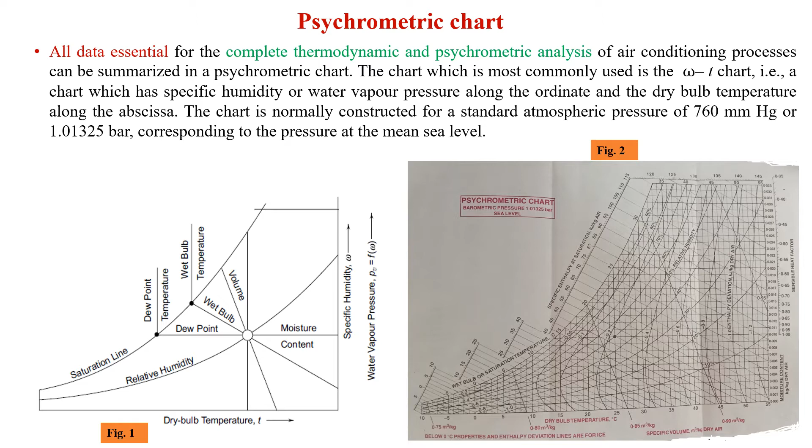Psychrometric charts are also prepared for sub-zero temperatures for extreme winter heating calculations, and for high temperatures for calculations of drying processes. In a sub-zero temperature chart, the water vapor pressure is that of sublimated vapor over the ice, since 0.01 degree Celsius is the triple point of water. Also, the latent heat used for enthalpy calculations is that of sublimation instead of vaporization. Psychrometric charts are to be specially constructed for localities at higher altitudes and consequently lower barometric pressures.

A keen observation of the psychrometric chart is really essential in order to understand the range of various psychrometric properties on the psychrometric chart. As we discussed earlier, the dry bulb temperature here is taken along the abscissa, and it is ranging from usually 0 to 55 degrees Celsius, and along the ordinate we have taken the specific humidity or the moisture content, and it ranges from 0.0 to 0.033 kg of water vapor per kg of dry air.

So this is the saturation curve, and there are lines parallel to these. So these are the constant relative humidity lines, and they usually range from 10% to 100%. There are inclined lines of constant specific volume also. When we look at its range, it ranges from 0.75 meter cube per kg of dry air to 0.95. So this is basically the workable range; most of the air conditioning equipment that we encounter usually operate in this particular range.

A specific enthalpy scale is also given here, which ranges from 0 to 115, and up to 145 kilojoules per kg of dry air. There are constant WBT lines also. These lines are slightly more inclined as compared to the constant specific volume lines. Their value can be read from this saturation curve here. As we move along this, we go through the different wet bulb temperature values at saturation. So these are 0, 1, 2, 3, 4, 5 degrees Celsius like this.

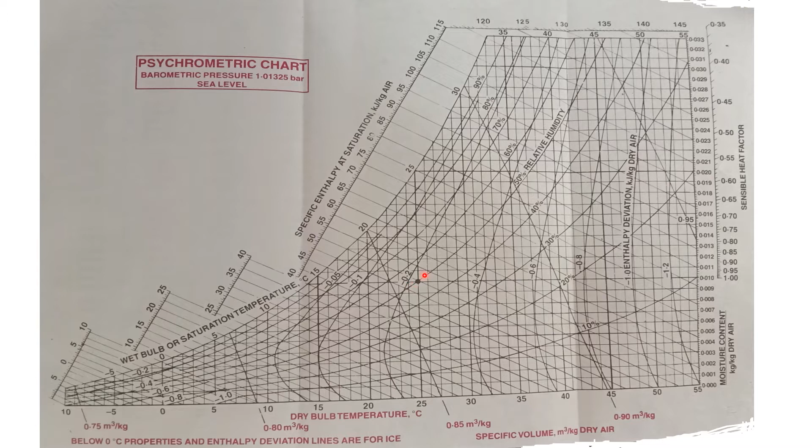So let us have a look at the range of various psychrometric parameters that appear on the psychrometric chart. We notice that the dry bulb temperature ranges from 0 to 55 degrees Celsius. Wet bulb temperature also ranges from 0 to 55 degrees Celsius, and dew point temperature also ranges from 0 to 55 degrees Celsius. Specific humidity ranges from 0.001 kg of water vapor per kg of dry air to 0.033 kg of water vapor per kg of dry air.

Specific volume ranges from 0.75 to 0.95 meter cube per kg of dry air. Relative humidity ranges from 10 to 100%, and the specific enthalpy scale goes from 0 to 145 kilojoules per kg of dry air. There are various types of psychrometric charts available with us. For the normal dry bulb temperature range of 0 to 50 degrees Celsius and omega, specific humidity, ranging from 0 to 0.03 kg per kg of dry air.

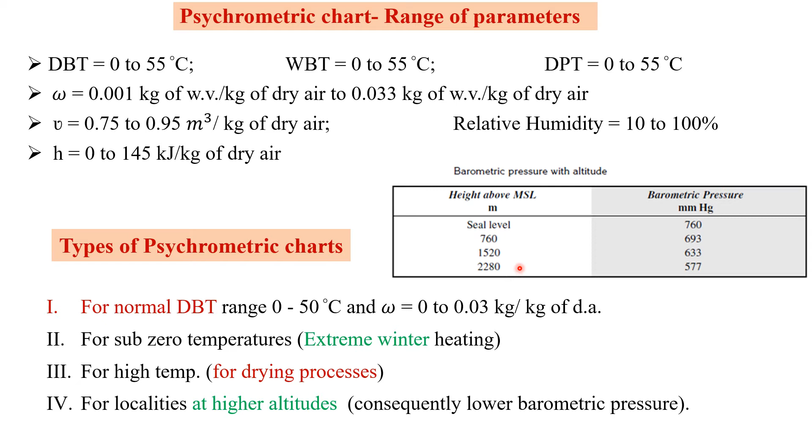For sub-zero temperatures, that is for the case of extreme winter heating, we have got a separate psychrometric chart. Likewise, for drying processes which involve high temperatures, we also have a separate psychrometric chart. And for localities at higher altitudes where the barometric pressure is lower, we have one more psychrometric chart. This particular table gives us an idea of how the barometric pressure varies with height from the mean sea level. So obviously when we go above the mean sea level, the barometric pressure decreases.

I hope that you still remember that when a given sample of moist air is cooled at constant pressure, the thermodynamic state of the water vapor changes along this constant pressure line, and the temperature at which the moisture present in the moist air becomes saturated is known as the dew point temperature. So there are two ways of making the air saturated. First, if the given sample of moist air is cooled at constant pressure, eventually it reaches a dew point temperature where the moisture becomes saturated.

Second way of making the air saturated at its dry bulb temperature is that if we keep on injecting moisture into it, the thermodynamic state would change along this isothermal line. So suppose here we have got point number 1. Point number 1 reflects the thermodynamic state of the moisture which is present in the unsaturated moist air. If I just move along this horizontal path and continue to inject moisture, the air becomes saturated, meaning it is now holding the maximum amount of moisture at its own dry bulb temperature.

So air is said to be saturated in this condition because the water vapor which is associated with the dry air part is now saturated. Its thermodynamic state lies on this saturated vapor line. So the saturation line represents the states of saturated air at different temperatures. As an example of fixing such a state on the psychrometric chart, consider an atmosphere A at 20 degrees Celsius dry bulb temperature and saturation as shown in figure 1.

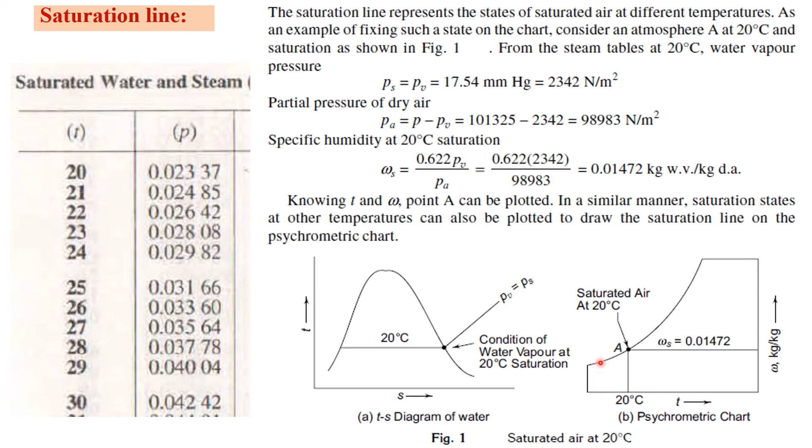So again the intersection of one vertical line drawn from this 25 degrees Celsius dry bulb temperature line and one horizontal line for the increased value of the specific humidity will ultimately give you one more saturation state, and that is the process of generating this saturation curve on the psychrometric chart. So we will continue to plot different saturation states at different dry bulb temperatures. So ultimately it is the locus of various saturation states which are obtained by the intersection of different DBT lines and different omega values.

Now we shall learn how the constant relative humidity lines are developed on the psychrometric chart. I hope that all of you remember that the relative humidity is the ratio of the actual vapor pressure to the vapor pressure which would exist in a saturated mixture at the temperature of the air. The saturation line on the psychrometric chart is therefore the line for 100% relative humidity, since for all points on this line, the partial pressure of the water vapor is equal to the saturation pressure at that particular temperature. So the lines on this chart for any other desired value of the relative humidity can be constructed as follows.

So how did we locate point number A on the psychrometric chart? It was obtained at a dry bulb temperature of 20 degrees Celsius. So for the purpose, we drew one vertical line for constant dry bulb temperature at 20 degrees Celsius, and also one horizontal line for the specific humidity at saturation state. So that is how we obtained the intersection of these two property lines and ultimately had this saturation state.

Now suppose we wish to generate a line for constant relative humidity of 50%. So obviously the partial pressure of the water vapor is going to be half of the value which is at 100% relative humidity at the same dry bulb temperature. If you still remember, the partial pressure of the water vapor at saturation was 2342 Newton per meter square. So at point number C, where we are trying to generate a line for relative humidity of 50%, the partial pressure is obviously going to be half of this value. So it is going to be 1171 Newton per meter square. So this is going to be the partial pressure of the water vapor.

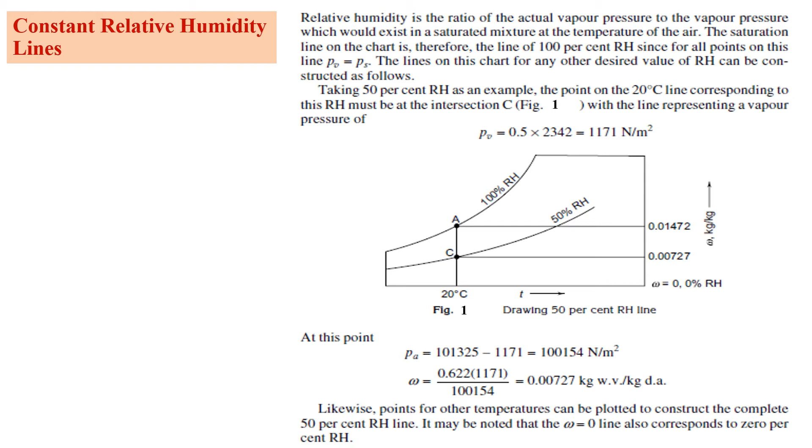It is for sure that one point on this constant specific volume line is point A, where it meets the saturation curve, meaning its thermodynamic state lies on the saturation curve. In order to locate this point, the following trial and error procedure is to be followed, because it is obvious that one end of this constant specific volume line would fall on the saturation curve, but at what value of dry bulb temperature it meets the saturation curve is not known to us.

So we will assume some suitable dry bulb temperature at point A and find PS equal to PV, because at point A the air is saturated, so the partial pressure of the water vapor is equal to the saturation pressure. We will assume the temperature at point A, find PS equal to PV with the help of the steam table, then calculate the partial pressure of the dry air, then calculate the specific volume and check it.

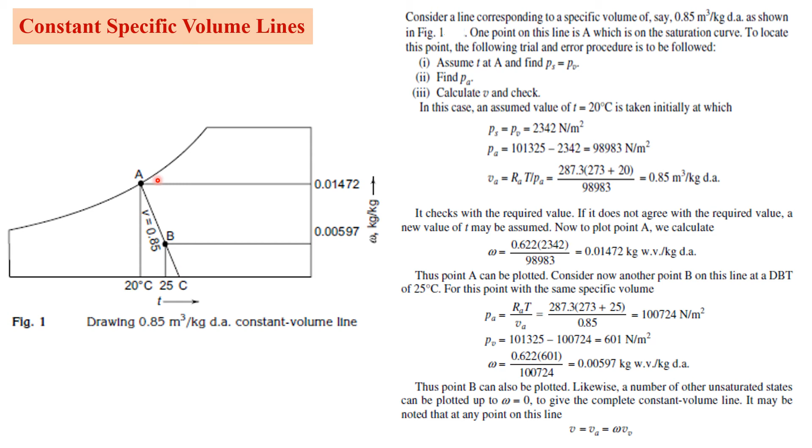So we will simply join the point number A and point number B and will extend this line up to the abscissa. So this is going to be the line for constant specific volume on psychrometric chart. Likewise, the lines for other constant specific volume values would be generated on this psychrometric chart. Now we shall see how the lines of constant thermodynamic wet bulb temperatures are generated on psychrometric chart.

In order to understand this, you need to again recollect the discussion on the adiabatic saturation that we had in the previous lectures. There is a very large container which is perfectly insulated from all around, containing a very large quantity of water. So it basically provides a large sheet of water. Unsaturated moist air at a dry bulb temperature of T, having specific enthalpy of moist air as H, and having specific humidity of omega, enters into that adiabatic container, and we assume that this bed of the water is very large.

So ultimately what happens when the air comes out of this adiabatic saturator, it is perfectly saturated at the temperature of the water itself. So its temperature drops from the initial dry bulb temperature T to the temperature of the water T star. Specific humidity level definitely goes up because certain amount of water is evaporated and gets mixed with the air. So its partial pressure of water vapor continues to increase, and its specific humidity also increases from omega to omega star. So omega star is the specific humidity corresponding to the saturation of the air at temperature of the water T star.

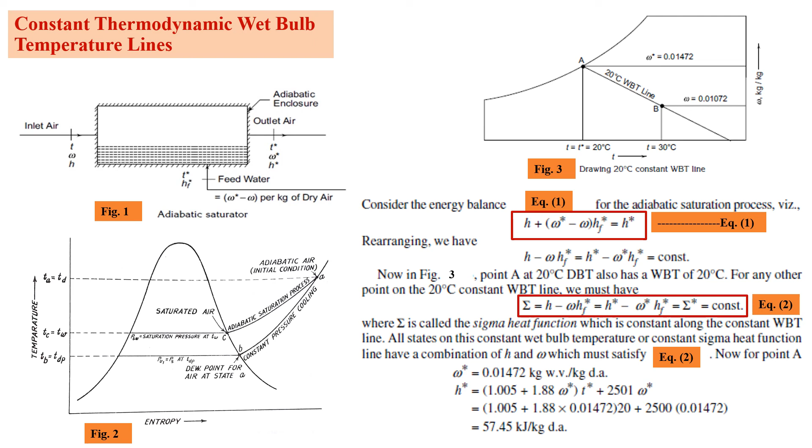Now HF star is nothing but the enthalpy of saturated fluid that we can directly get from the steam table. At 20 degrees Celsius, the HF value is 83.9 kilojoules per kg. Now we determine the sigma heat function corresponding to the saturation state. It is H star minus omega star into HF star. So we again insert the values: H star is 57.45, omega star is 0.01472, and HF star is 83.9.

So this sigma star comes out to be 56.21 kilojoules per kg of dry air. Now for point B, suppose the point number B lies on this constant WBT line but at some different value of the dry bulb temperature. Say the dry bulb temperature at the point number B is 30 degrees Celsius. So the parameter that does not change is the sigma heat function. Sigma heat function at A and sigma heat function at B, it does not change.

So sigma heat function at point number B is going to be H minus omega into HF star. Since definitely at point number B the air is not saturated, it is simply a moist air, so it is going to be H minus omega into HF star, but H now is to be calculated at 30 degrees Celsius. Omega is now again required to be calculated at 30 degrees Celsius. So what we do is we insert the values of this enthalpy of moist air. It is going to be 1.005 plus 1.88 omega, omega is not known to us, into dry bulb temperature, 30 degrees Celsius.

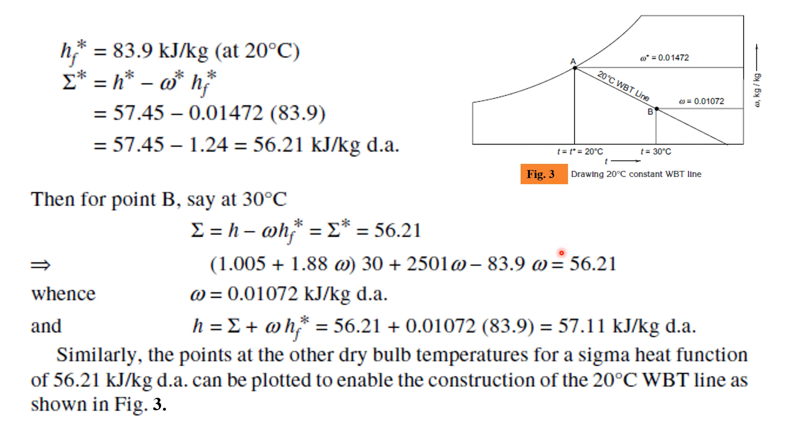Now we shall learn how the constant enthalpy lines are developed on the psychrometric chart. If you still remember this energy balance for the adiabatic saturation process, H plus omega minus omega star into HF star is going to be equal to H star. It may be observed from the preceding calculations that the difference of the enthalpies at the saturation point A and another point B on the constant WBT line is very small. The difference, denoted by capital D, is called enthalpy deviation, and it is given as H minus H star. The enthalpy of the saturated air at point A is denoted by H star, and the enthalpy of unsaturated moist air at point B is denoted by H. So with the help of this equation, H minus H star is nothing but omega minus omega star into HF star.